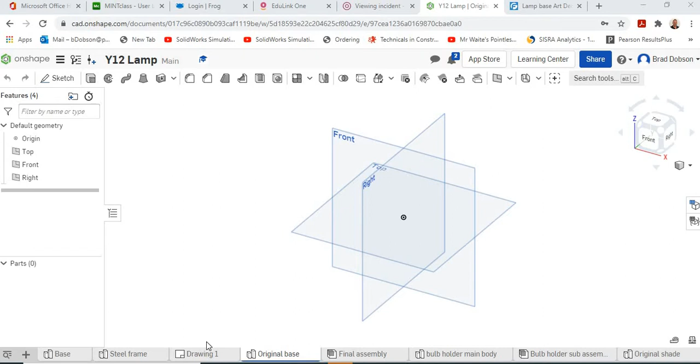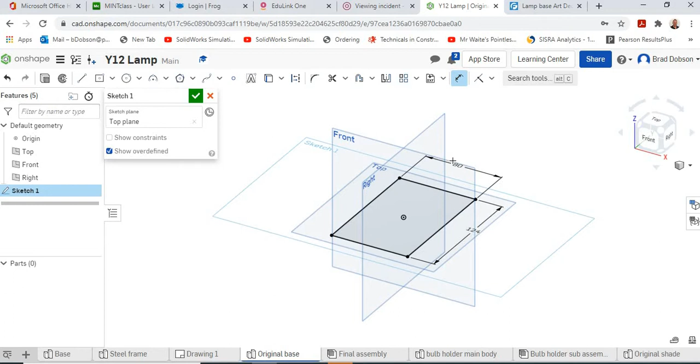So, I'm going to look at drawing up the original base now. Relatively straightforward job. Top plane, do a centre rectangle. Dimensions are 124mm by 80, and we're then just going to extrude that up, 21mm high, the original one.

Once I've done that, I'm just going to shell it out. So I use the shell function, select the bottom, and the shell width, I would say, is actually quite thin. It's about 0.5. I've just measured it. I'll leave it at 1 actually, I think.

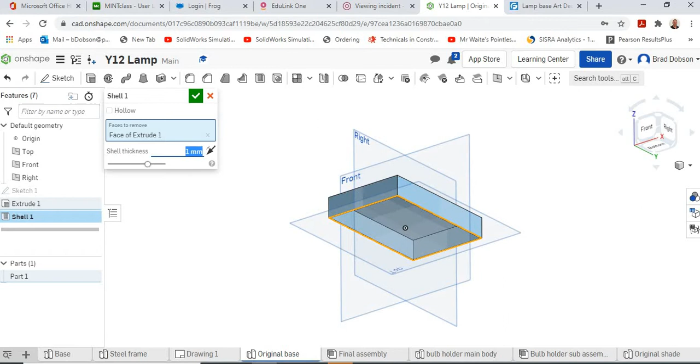So that creates the sort of basics. It has got a little lip on the inside edge here, so I'm going to create a new sketch. A bit awkward doing this one because you have to select that bottom face to draw the sketch on.

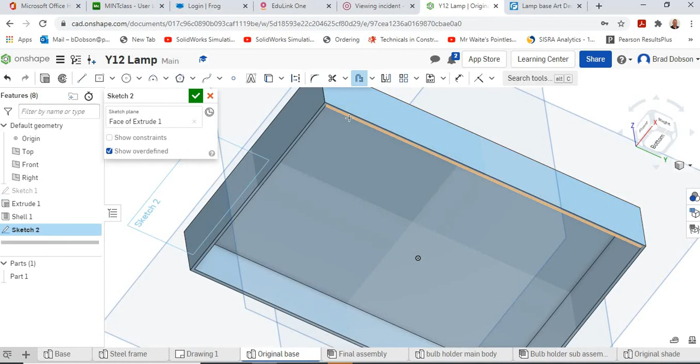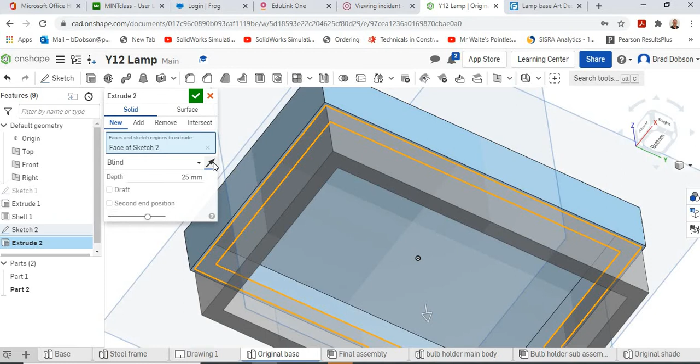And again, this time I'm going to use the offset tool, so I'm going to offset that. It is actually a 5mm chamfer, so that's dead easy. So offset that, offset that, offset that. Once we've done that, we're then going to extrude that. It actually goes into the work, so you need to flip it, and again it'll just be a 1mm offset. So that'll create that sort of hollow box section.

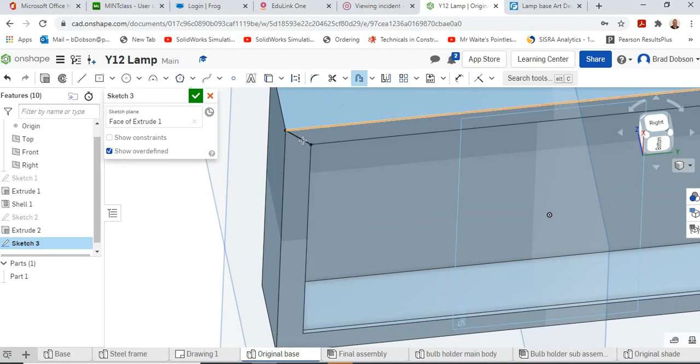Again, it was actually folded steel, so there is actually a tiny little join there. If you wanted to be really correct, you could, in theory, draw on a little section, potentially offset that, create yourself a little tiny gap, again offset that one. Well, you get the idea. I'm not so worried about that detail, to be honest.

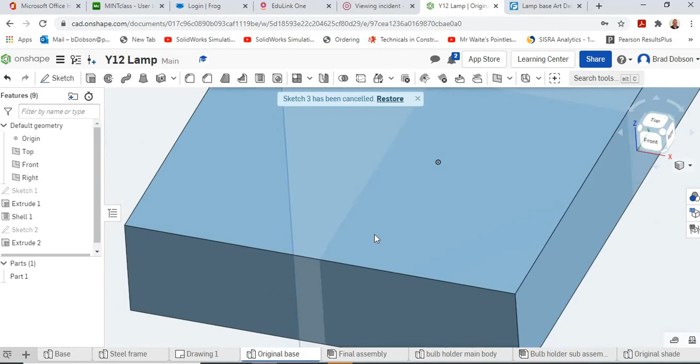So, when you get bored. So all we then need to do is put it, it has got 3 holes on the top. So again, sketch, should be getting pretty confident now at doing all this. So again, we're going to go for the midpoint, hover over line, inference it down. We'll dimension that. That's an 8mm hole on the original.

Again, dimension vertical distance down, which is 22. It's then got another couple of holes down here. Again, same size, 8mm.

And then we just need to dimension the height, so from there to there. That height was 75, and again we've then got a distance in between, so I'm actually going to do it from the centre. So half of 42 is 21. So yeah, the hole centres are actually 42mm.

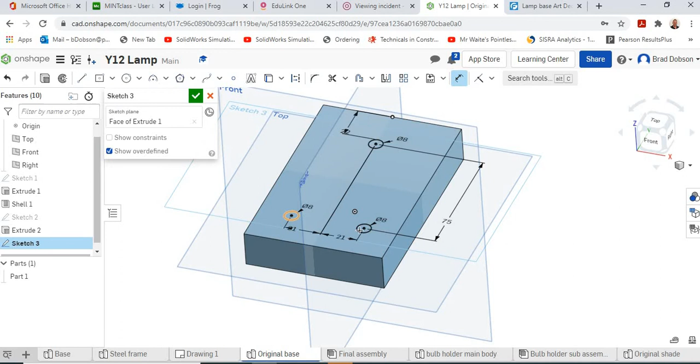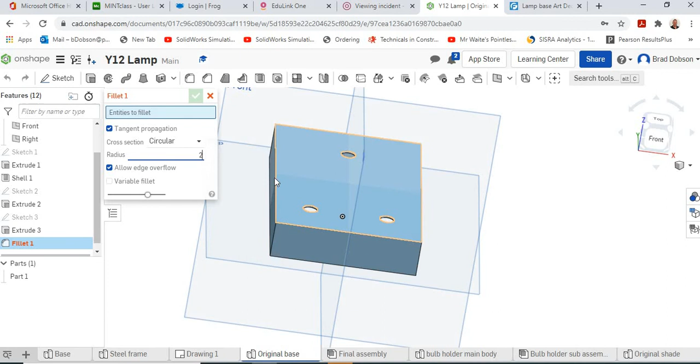Once we're happy with that, we then just extrude, remove, through all. And the last little thing, because it was pressed steel, we're going to do a little rounded edge on the top. So again, it's probably only a 2mm one, I would suggest. And we're just going to select the top edges. And leave it at that, I would say.

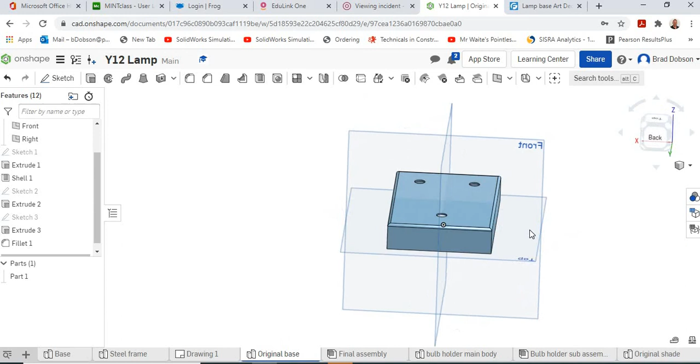That's about right. So that was the original base. It was actually filled with a bit of sort of cast resin inside, but that unfortunately fell out. That's it. Last thing you might want to do is change it to a more realistic colour.

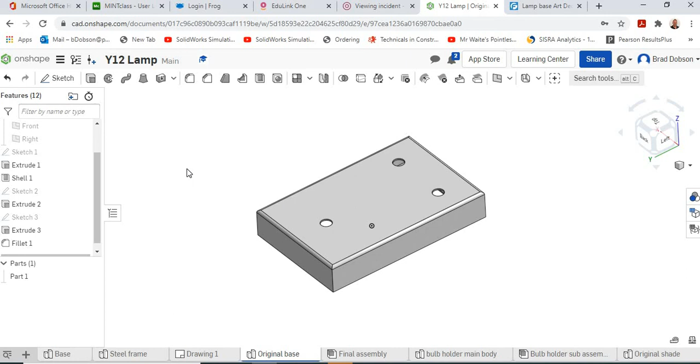And then you can hide all the planes, and we've got our last feature. So in theory we've now got all the parts that we can do for our original lamp, and potentially produce the quick working drawings of each of the parts for our research pages.